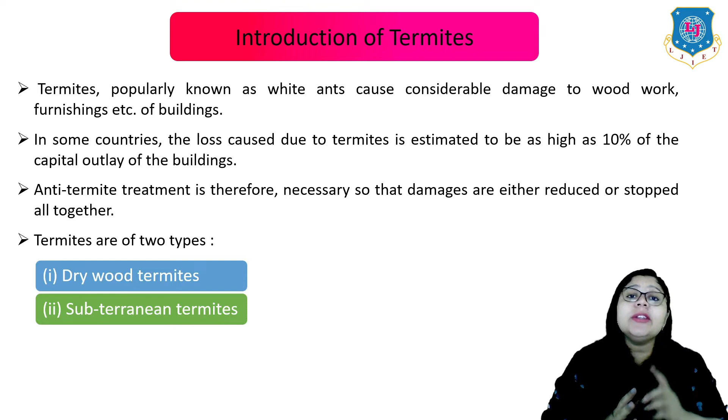So termites are of two types. First one is the drywood termite and the second one is the subterranean termite. So let us understand first the drywood termites. These termites live in dry wood in small colonies without maintaining any connection with the soil. They are generally found in humid coastal areas. In India, they are found on coastal regions of South India, though their number is very low. They travel and work through wooden structures only. Here you can see the image of drywood termites.

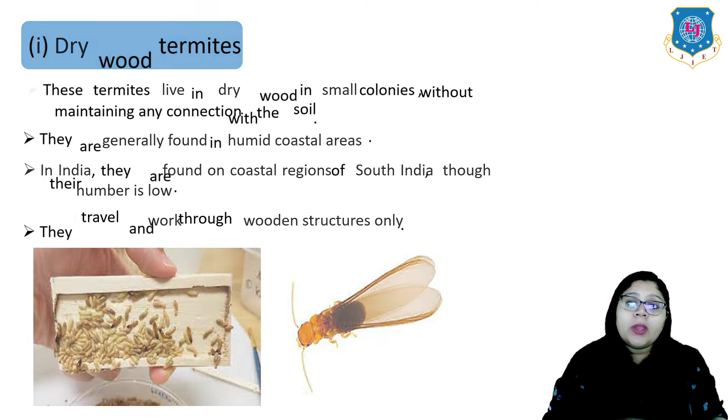Now let me give you the idea about the second type, which is subterranean termite. These termites have their main colonies in soil, it means underground. They cannot survive without maintaining any connection with their prime colonies in the soil. However, they travel in search of food, mostly wood and cellulose matter, through shelter tubes or galleries or tunnels in other material. These tubes are coated with soil around. As they consume wood, secondary colonies are developed there.

These termites require moisture for their existence, and these termites enter the building through foundations or from ground adjacent to the building and advance upward through floors, destroying everything that comes within their reach. They also travel through cracks and crevices in masonry and joints or cracks in the floor. Here you can see the example of this kind of termites.

But when I talk about northern India, the most important species are those belonging to the group of subterranean termites which live in extensive colonies in the ground. Sometimes they build their nest near ground in stumps of dead trees or create colonies in the form of dome-shaped mounds on the ground. They require both moisture as well as darkness for their survival. And these termites have five castes: queen, king, soldiers, sexual winged male or female adults, and lastly the workers.

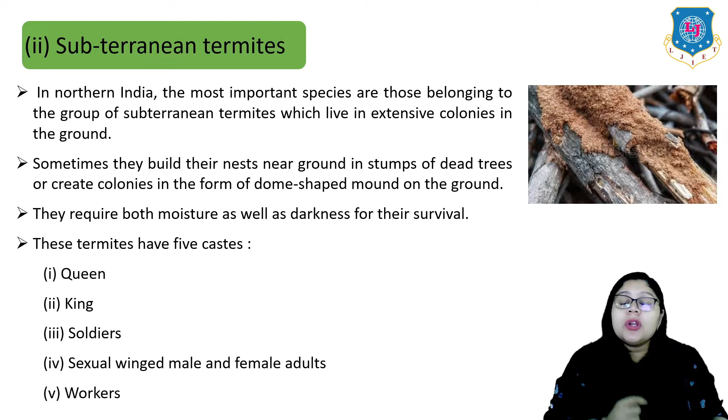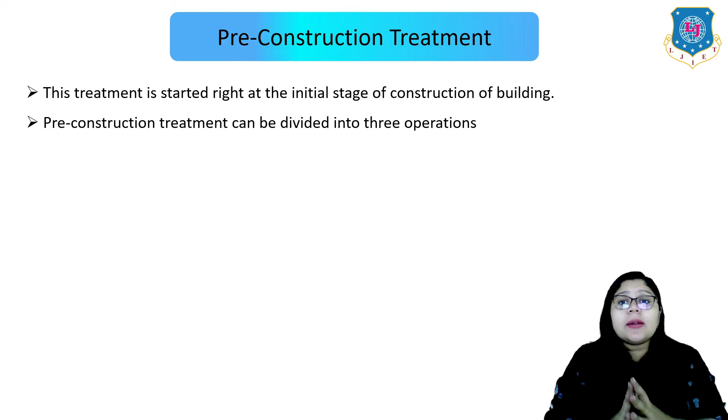So now let me give you the idea about the anti-termite treatment. Generally it can be of two types, pre-construction and post-construction. Let us talk about the first one, pre-construction treatment. This treatment is started right at the initial stage of the construction of the building. Pre-construction treatment can be divided into three operations, where the first one is the site preparation, second one is the soil treatment, and third one is the structural barriers.

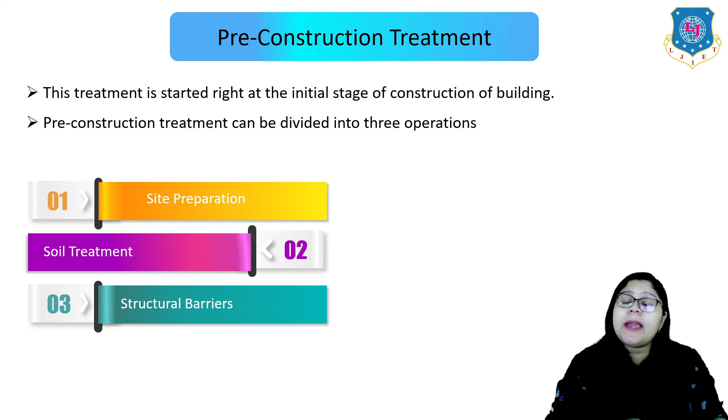So let us start with the first one, site preparation. This operation consists of removal of stumps, roots, logs, waste wood and other fibrous matter from the soil at the construction site. This is essential since the termites thrive on these materials. If termite mounds are detected, they should be destroyed by use of insecticide solution consisting of any one of the following chemicals. Here you can see a list of chemicals where DDT, BHC, aldrin, heptachlor and chlordane are there, where the concentration by weight is again mentioned over here.

So 4 liters of the above emulsion in water is required per cubic meter of volume of the mound. Holes are made in the mound at several places by use of crowbar and the insecticide emulsion is poured in these holes as shown in this figure.

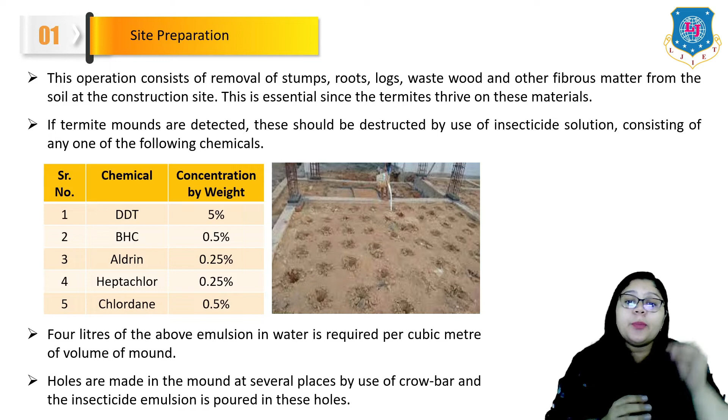Now let me talk about the second one, which is soil treatment. The best and the only reliable method to protect buildings against termites is to apply a chemical treatment to the soil at the time of construction of the building. This should be done in such a way that a complete chemical barrier is created between the ground from where the termites come and the woodwork in the building.

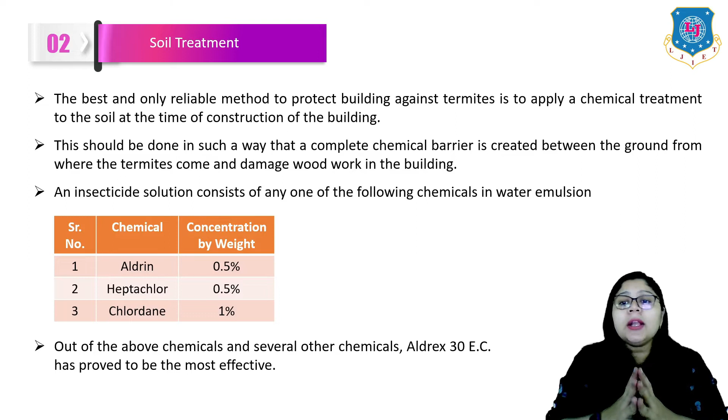An insecticidal solution consisting of any one of the following chemicals in water emulsion is used, like aldrin, heptachlor and chlordane. Out of the above chemicals, Aldrex 30EC has proved to be the most effective.

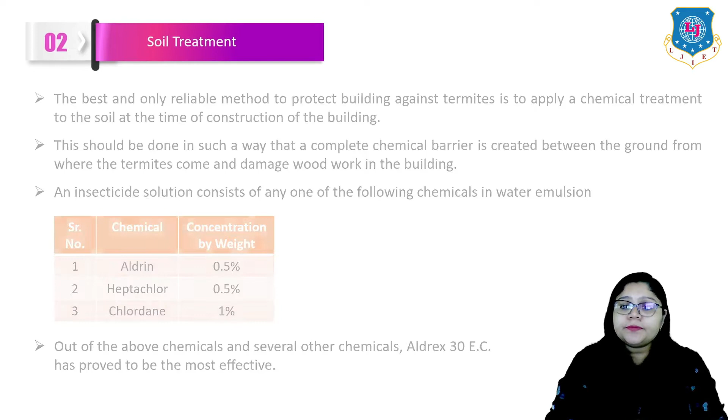Now, the emulsion should be applied evenly, either with a watering can or a sprayer, at the following stages. Stage 1, in foundation pits, to treat the bottom and sides up to a height of about 30 cm, and the emulsion is required at the rate of 5 liters per square meter.

Stage 2, where the refill earth on both sides of all built-up walls for a width of 30 cm and depth of 45 cm approximately, and the emulsion is required at the rate of 5 liters per square meter. Stage 3, before laying the floor, the entire leveled surface is to be treated at the rate of 5 liters of emulsion per square meter.

The stages of treatment are as shown in the figure diagrammatically. When used as recommended above, approximately 200 ml of Aldrex 30EC would be required to treat 1 square meter of the covered area.

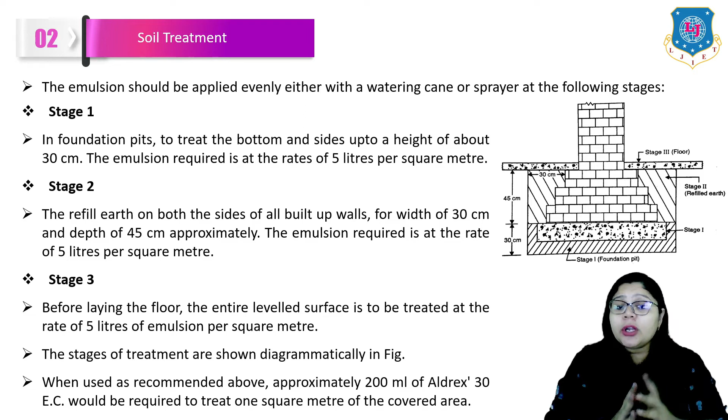Now, let us talk about the third treatment, which is the structural barrier. A continuous, impenetrable physical structural barrier may be provided continuously at plinth level to prevent entry of termites through the wall. These barriers may be in the form of a concrete layer or metal layer. The cement concrete layer may be 5 to 7.5 cm thick. It is preferable to keep the layer projecting about 5 to 7.5 cm internally and externally.

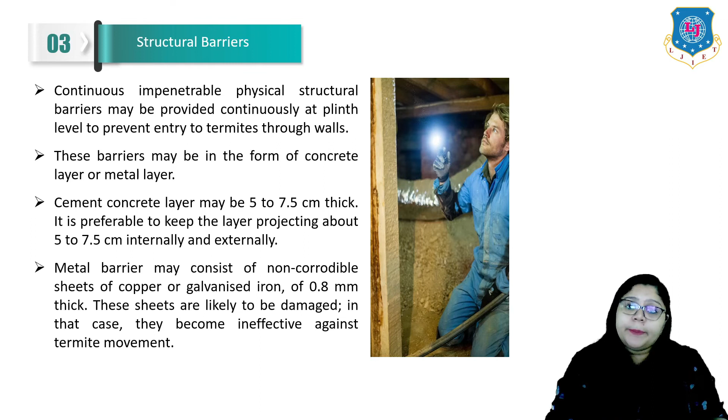A metal barrier may consist of non-corrodible sheets of copper or galvanized iron 0.8 mm thick. These sheets are likely to be damaged. In that case, they become ineffective against termite movement. So, this is all about the pre-construction treatment.

Now, let us talk about the post-construction treatment. It is a maintenance treatment for those buildings which are already under attack by termites. As stated earlier, termites, even after entering the building, maintain their contact with the nest or colony in the ground through shelter tubes or tunnels lined with soil. So, this fact is well utilized in this treatment.

It is essential to carry out an inspection to estimate the magnitude of spread of termites in the building and to detect the points of entry of termites. These points may be near the vicinity of columns, basements, steps leading from the ground, bathrooms and lavatories, or even leaking pipes, drains, etc., and the places where woodwork is embedded in the ground.

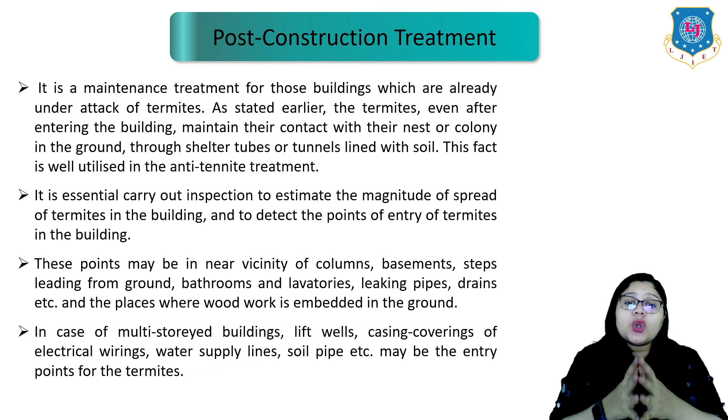In case of multi-storied buildings, lift wells, casing covering electrical wiring, water supply lines, soil pipes, etc. may be the entry points of termites. Wherever these shelter tubes are detected, they should be destroyed after injecting anti-termite emulsion through them. If the attack is severe, the soil around the building and under the floor may be injected with anti-termite emulsion, up to a depth of 30 cm below ground level.

To prevent the entry of termites through voids in masonry, 12 mm diameter holes are drilled at 30 cm center to center at a downward angle of 45 degrees from both sides of the wall at plinth level, and chemical emulsion is pumped into them under pressure. These holes are then sealed.

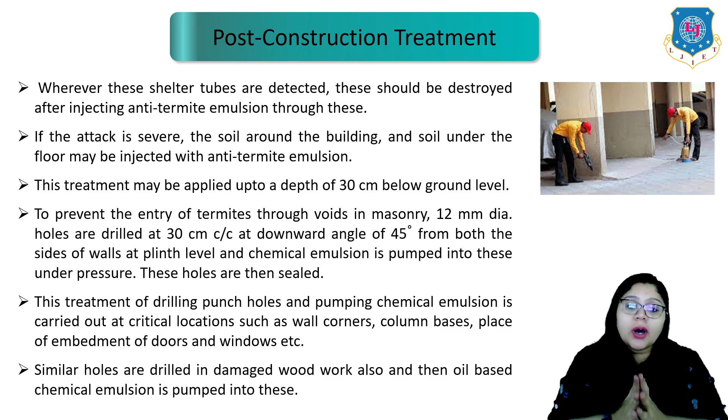This treatment of drilling holes and pumping chemical emulsion is carried out at critical locations such as wall corners, column bases, places of embedment of doors and windows, etc. Similar holes are drilled in damaged woodwork also, and then oil-based chemical emulsion is pumped into them.

With this, we have covered all the topics of termites as well as anti-termite treatment related terms. I hope you understand all these things in detail.